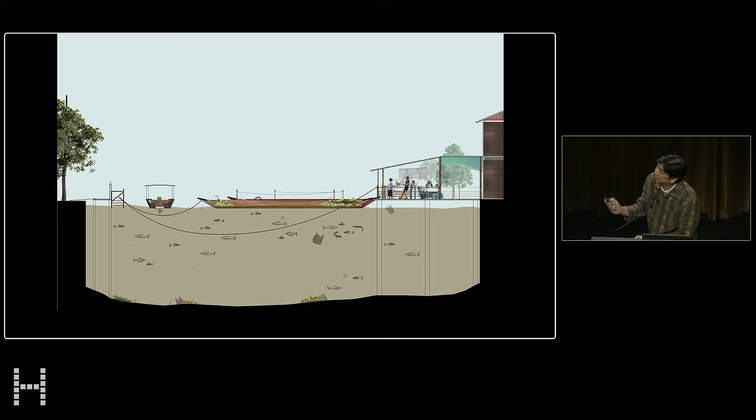After seeing this, what I do is I draw, and draw. I think seeing things from plans, sections, and elevations is the best thing I could do to honor these funky concoctions. For example, there's an isometric, but we don't only draw the boats, we draw the dirty water, the stray dogs, the motorcycle taxis, the corrugated sheets. We curate the sections. This section is cut through the boat so you can see how the rope is given slack so it doesn't get tied up in the propeller. We look at the details of how the pulley system is concocted, hacked at every joint. So in essence, with these three drawings, we see the detail, the architecture, and the urbanism.

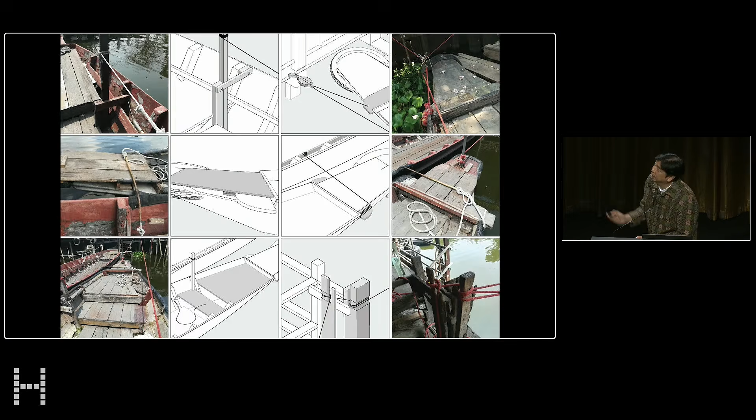And we always name them very simply, bridge, boat. This is just one example of what I call Bangkok Bastards. They're homegrown concoctions created by everyday people to solve everyday problems in everyday life. I've been collecting them probably since 2012.

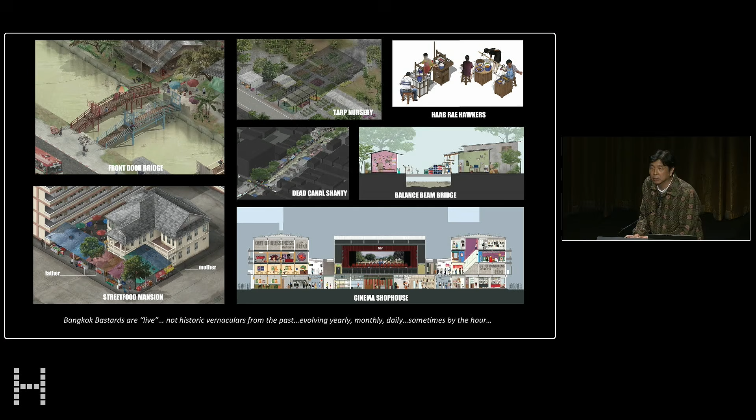So Bangkok Bastards are live. They're not historic vernaculars from the past. They're always changing yearly, monthly, daily, sometimes by the hour. And they're usually made up of cheap, inexpensive, salvaged materials because the people who make them are probably the underprivileged, which forces them to work within their means and thereby be very creative.

This is one of the first Bangkok Bastards that infatuated me. I started recording them in 2012. It's a construction worker house. They're all over Thailand. Construction workers in Thailand, like in many parts of Southeast Asia and South Asia, live on site. They collect old materials, whether old steel tubes, timber, plywood, to create their own dormitories.

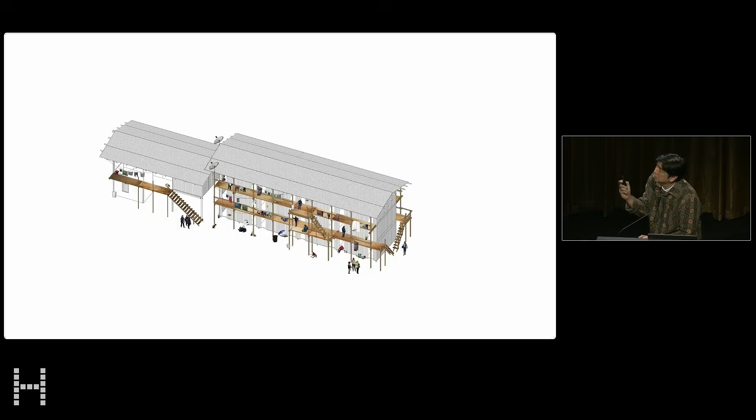But it's not simply a messy architecture. I was so fascinated by it, but I didn't want to be seduced by the romanticism of slum architecture. So at a certain point, I went in and started to measure and understand that it isn't just things hastily slapped together, but there's a system to it. For example, the core itself, or the rooms themselves, are probably very hot and humid, 2.5 by 2 meter rooms, very hot, kind of suffocating, and not much ventilation.

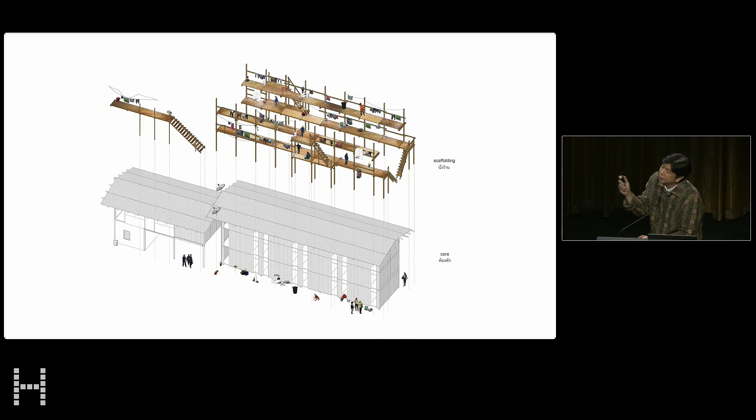But what makes life livable in the construction worker house is the scaffolding. This buffer space allows you not only to block the sun and the rain, but is a space for eating, drinking, getting drunk, washing clothes, hanging laundry—a multi-purpose living space.

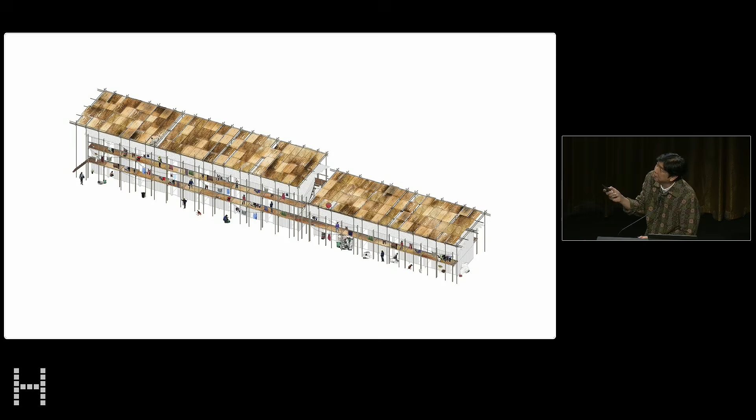So if you see that that's kind of a formula that construction workers play with, then they start to change it to solve other problems. For example, this is a construction worker house in the back of that site where debris was falling from above. And so the scaffolding was hacked so that it became a double roof, almost like a safety helmet.

Where the plywood top roof protects falling debris from puncturing the thinner corrugated sheet metal on the bottom. If you have scaffolding and core, you start to multiply. Core, scaffolding, core, scaffolding, core. From house, you have housing. The playfulness doesn't end at the diagrammatic level. The corrugated sheets get bent into a V. It becomes a water runnel that reflects back onto the underside of the corrugated sheets, making a beautiful natural light fixture.

If they run out of corrugated sheets, they bring in agricultural tarp, which changes the meaning of architecture. For example, instead of a typical door with a doorknob, you basically just unbutton the door and go inside. Once inside, there's no standard window. All the workers are pretty much lying or sleeping on the ground because it's cooler. There's no furniture, so they simply peel up the wall, creating an aperture of light and air that comes in just where they're sitting.

I was also very much interested in what I call the curtain sex motel. It's a building typology I was at first afraid to go into because strange things happen there, and I wasn't able to get access. But one day, I was able to find the owner of one of these curtain love motels, and he allowed me to go in and study his picnic curtain sex motel.

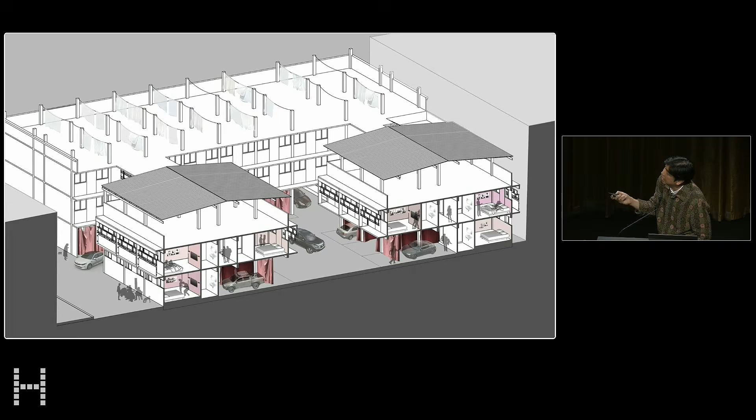As you approach, you go through the tunnel. Sometimes the tunnel is very scary because they buy a whole shop house just to carve a tunnel through. And then you emerge into this open air internal street where an attendant beckons you into one of these curtain spaces, and they close the curtain. And then afterwards, you come out of your car, and there's a room attached to the parking spot where you can go in and play gin rummy or whatever type of games you want.

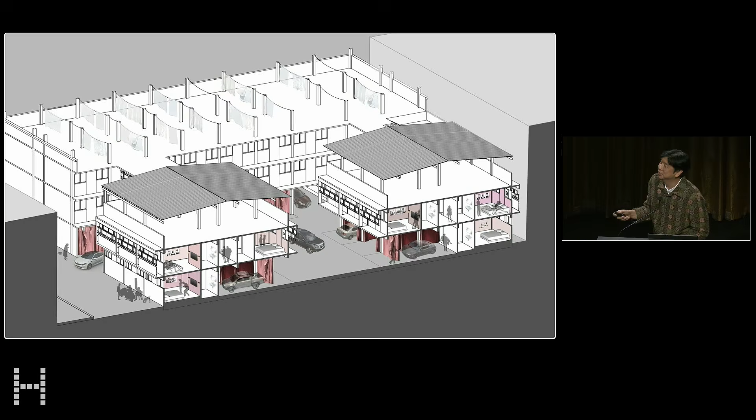After 10 minutes or 2 hours, you leave. And there's a secret exit, a side alley that allows you to make a quick escape because your husband or your wife may be waiting at the front entry. So here, I diagrammed it for you. You go out like that.

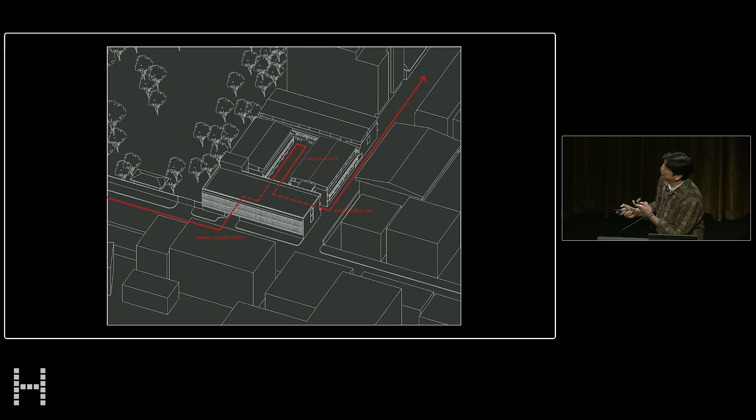But then 4 years later, after breaking my heart, he said, 'Chat, I just bought another sex motel. Would you like to renovate this one?' I said, 'Yes.' This one's called the Mit Paisan Curtain Motel. It stands for Friendship Motel. Okay.

So keep that in mind as we develop the program. I'll talk about the program. Eventually, he saved up enough money to buy a taxi, eventually becoming a manager to a tailor shop that he named James Taylor. Some of you, the younger people, may not get it, but the older people may get it. And eventually buying a slew of love motels. That's become his own business.

So the Friendship Motel has a courtyard just like the Picnic Hotel. It has the standard tunnel that the car would go through. Inside, you have the open air internal street. The problem with all living units or guest units in curtain love motels is they're very small because you don't spend very much time in them. They're about 3 meters by 4.5 meters.

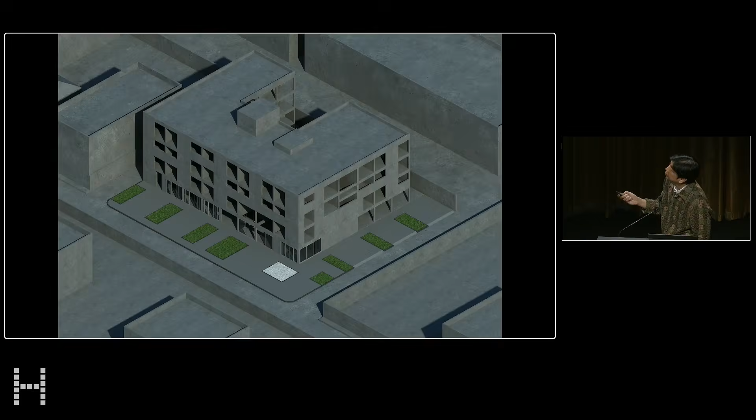We're going to cantilever a bed box from the existing structure so we don't introduce any extra costs. So there are these bed boxes that in the daytime you can play on your phone, you can read, look down to the street, but at nighttime it becomes a third bed. If this were the building stripped of its fake brise-soleil, what we added was these bed boxes. These bed boxes were minimal in size because we wanted to be very frugal.

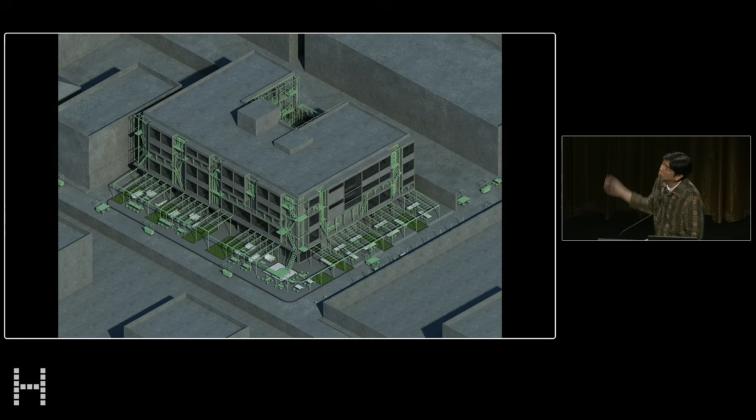It had a 1 meter by 2 meter clearance, just enough for a twin-size bed. But what happens is you're left with these gaps between these little pods that are filled with the scaffolding I told you about, that you find all over informal architecture in Thailand. But in this case, the scaffolding will turn a once dark and mysterious building inside out, turning this love motel into a street hotel that hopefully energizes and brings life back to this red light district.

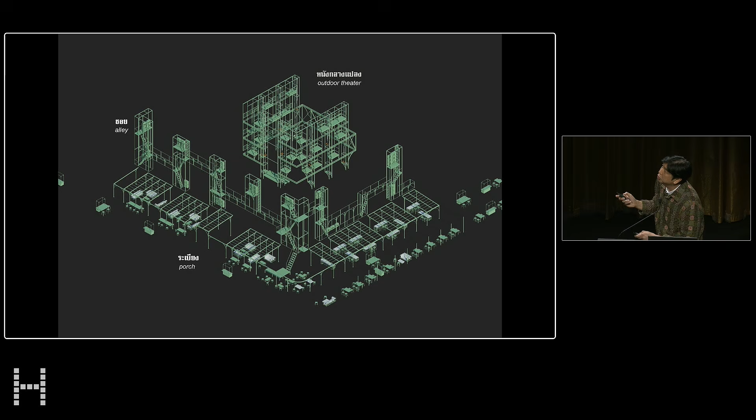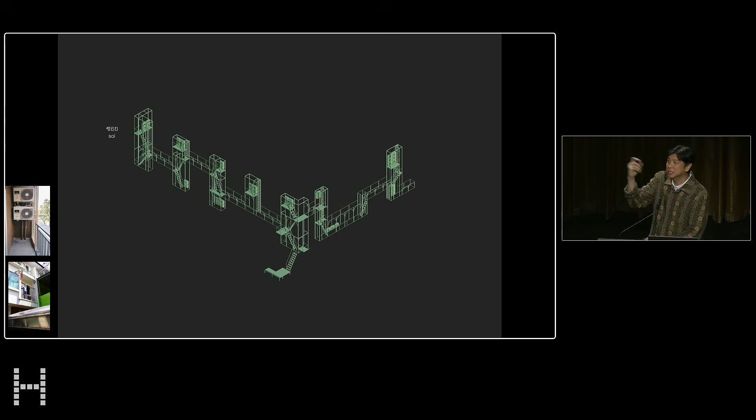So the scaffolding is composed of three elements: the porch, the alley, and the outdoor theater. The alley is actually a vertical circulation that allows repairmen to service all the air conditioning and MEP systems, so that you won't have maintenance people going through your room and your bedroom to service them on the balcony, which is usually the case in Asia.

So you've got this kind of walkway that repairmen can use to service MEP. But then there's another surprise function I'll show you later with these little vertical alleys.

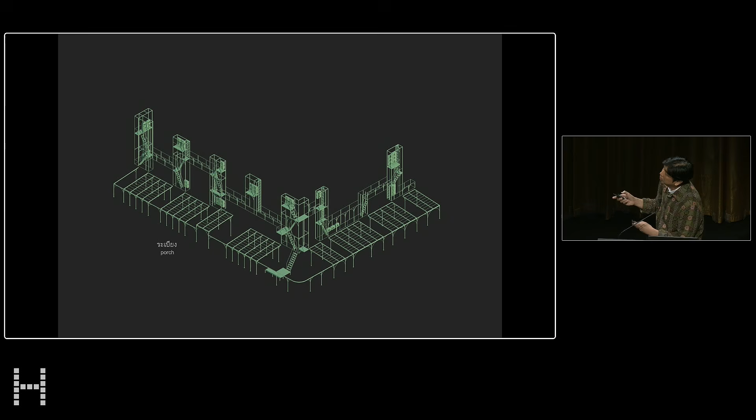The porch basically makes most use of space that's usually neglected, which is the setback. If this were the perimeter of the site, typical developers would say, Chat, put up a wall, a solid wall. We want to keep the vagrants out, and we want to create this private oasis garden, right? But what happens with terrible walls that we've seen in Southeast Asia is it kills the city. Nobody wants to walk next to a CMU wall.

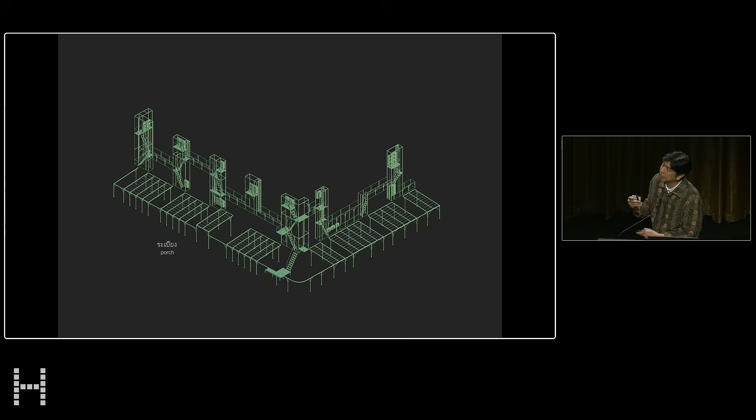So instead, we decided to create this connector, a veranda that allows locals on the sidewalk to have a beer with the hotel guests inside. But also, we go back to Papa Tony's first love of street food.

So this is Brother Chicken. Thai people have weird nicknames, so his name is Chicken. This is his armada of Thai sausages that he prepares every morning before he goes out.

So we had a conversation where, what if for breakfast Papa Tony sends his guests down. Instead of just having a continental egg and bacon breakfast, you come down and have Thai beignets, soy milk, or Thai sausages, and you support the local economy. In that sense, you create a new, authentic branding for a street hotel. So it works both ways.

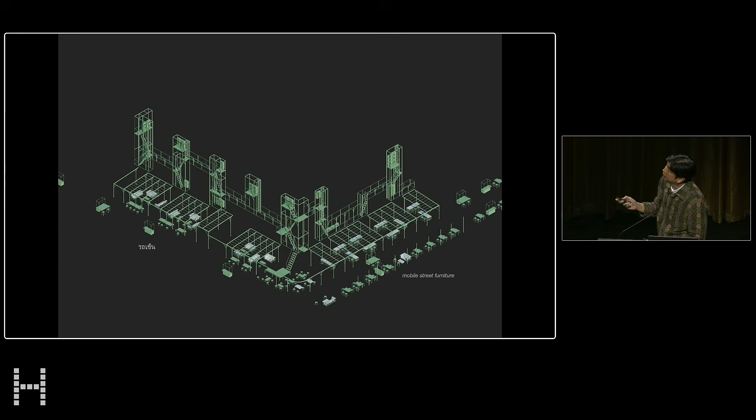For us, architecture in Thailand isn't just walls and floors and roofs. It's basically folding tables, plastic chairs, food carts, all these non-architecture elements, even these blinking holiday lights, create space, but space that's dynamic and always changing.

On that day, I forgot to mention that at the time, the municipality was cracking down on street vendors because they wanted to clean Bangkok up and turn it into a Singapore kind of situation, where you have hawker courts and can localize the vendors in one area. But to us, that would kill street food in Thailand, where vendors need to roam to find their customers, right?

So at that time, Papa Tony allowed vendors to come and sell on his private property so the police wouldn't chase them away. If you remember the vertical alley that repairmen used to service air condensers, on weekends and festivals it turns into a vertical stage. And I think this is our opening night.

So the air condenser landings became dance platforms for these beautiful Japanese housewives who volunteered to dance for us.

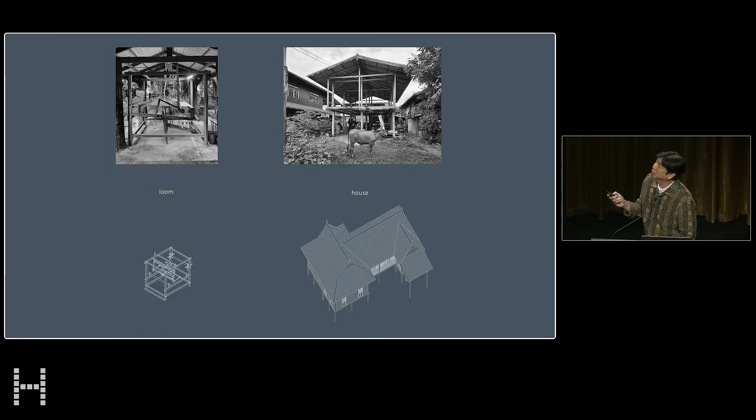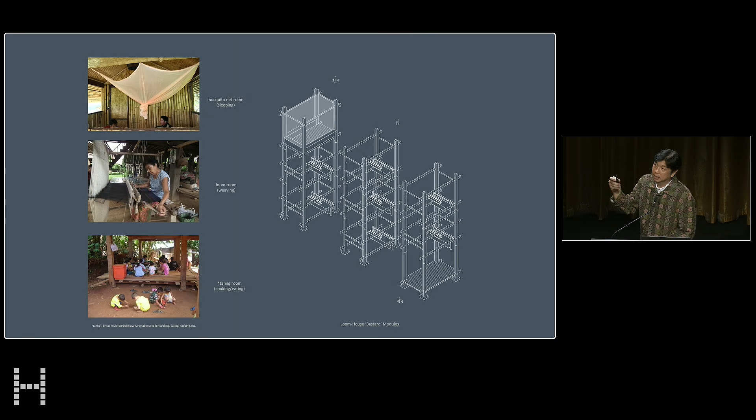So we started to think about how the loom and the house are really made from similar components when you explode them, and we tried to see if we could combine these components of the house and the loom into a new program that could potentially be workshop and housing for these elderly craftspeople and textile workers. This is an idea and concept that we developed for this loom house before anybody hired us, we were just interested in it.

And as is usually the case when we do research, eventually, whether it's 5, 6, or 7 years, an empathetic person comes along who's a perfect partner. In this case it's Kun Man, a wonderful textile artist who's in Sakon Nakhon as well. He does these amazing indigo textiles, but also all these natural colors from bark and leaves, and he wanted to collaborate with us to create this new workshop for his own textile workers.

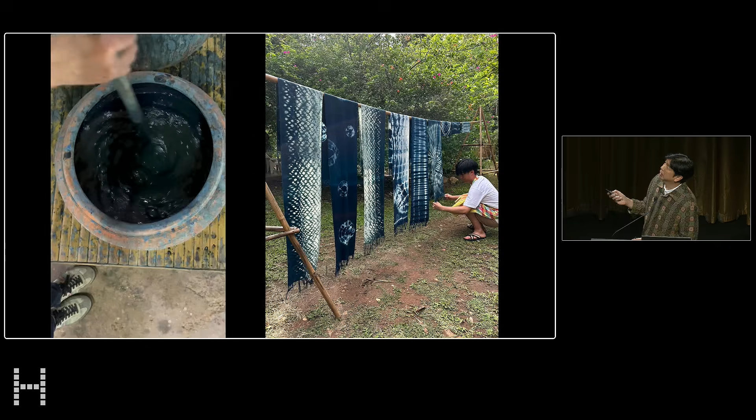So these are the wonderful indigo workshops that he has in his own forest.

He was an ex-lawyer who decided to try his hand at textiles and became a wonderful artist. He bought this piece of property to create a forest of natural pigment plants where he could examine and experiment with indigo and other dyes.

As usual, we always have to research the artifacts and the architecture around weaving. We started with the aunties who wove the textiles in Kun Man's business. This is Auntie Git and Auntie Gao, and they're the ones who create these beautiful textiles.

This is called a Baan Tai Tun. In Thailand, as common with a lot of Southeast Asian countries, there are houses on stilts that are lifted up to escape the floodwaters. The underbelly of the house actually becomes the workshop where the looms and other weaving artifacts are. So we try to understand all of these spaces and how they're used.

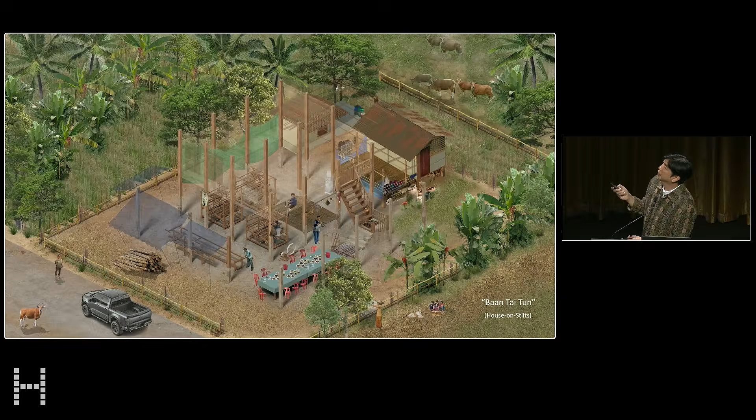I'm making it very simple, but weaving is very complex, especially when you have to set up the weaving process. You have the warp string, thread, and the weft. Basically, you have to count the total length of the warp before you set up each textile. This is a tool that you basically just walk around maybe 200 times to count correctly how much warp you need. It's an interesting tool.

At the end, we wound up with all these Bangkok bastards and basically tried to create a new concoction called the loom house. As always, we try to use salvaged materials. These were old columns from old Thai houses that have these great notches in them where the beams were notched in. These scars to us were very beautiful, and we want to celebrate them.

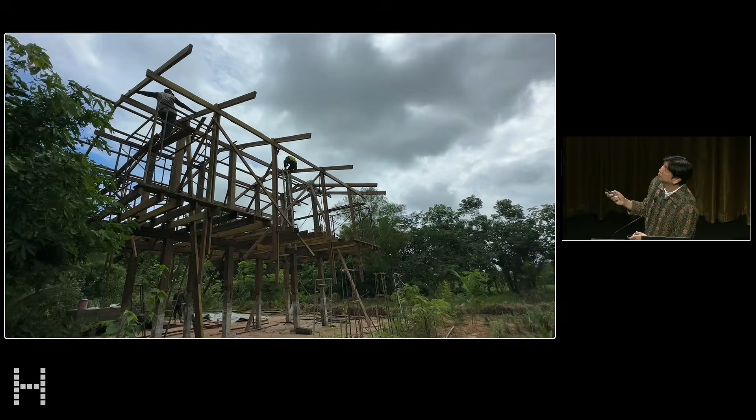As you can see, because this is called a loom house, the structural elements—if you see these 4 legs—are actually the dimensions of the legs of a loom. So these 4 loom legs actually support the whole house. This was situated right next to a rice paddy in Kun Man's garden. The legs become the loom, but also are structural columns for the house itself. Even the notches are improvised so that the cross beams are snaking up the notches.

Kun Man one day suggested, wouldn't it be great if we could dye the house the same color as his textile? So he created a new tempera indigo paint in order to paint the house in indigo, and here the villagers are helping out. So from the loom house, it became the indigo loom house.

And I think there's a short video. The bottom level is reserved for the wet process, for example the mixing of the indigo and the dyeing.

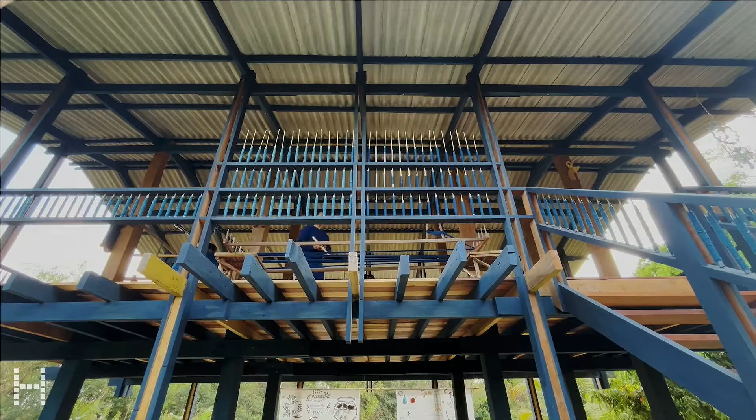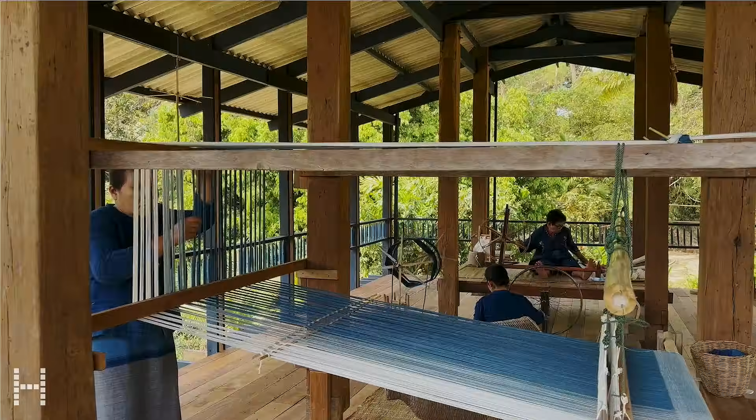Here you see we created this new bastard, the warping wall, where we hybridized this warping frame into a vertical element. The handrails also become containers for the indigo spools as well. Now the weavers can actually come and weave together rather than being alone in their homes.

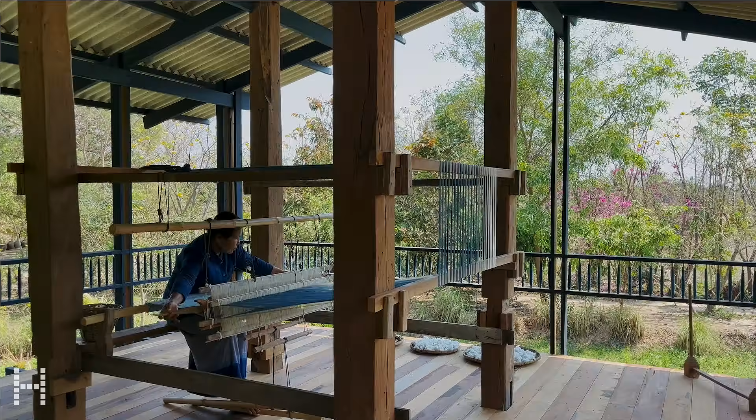On top of being able to weave together, there are now weekend workshops where the weavers can come and share their knowledge with the community, whether from Bangkok or foreigners who've traveled afar. So it gives new meaning to the weavers that used to be isolated in the underbellies of their houses.

In actuality, the loom house didn't start with this project. The first concept was actually what I call the loom condo. I imagined a rurality that would be densified and modernized, not with concrete or cement roads and apartment high-rises, but there would be a density, a beautiful natural density of architecture that would sit in the rice fields.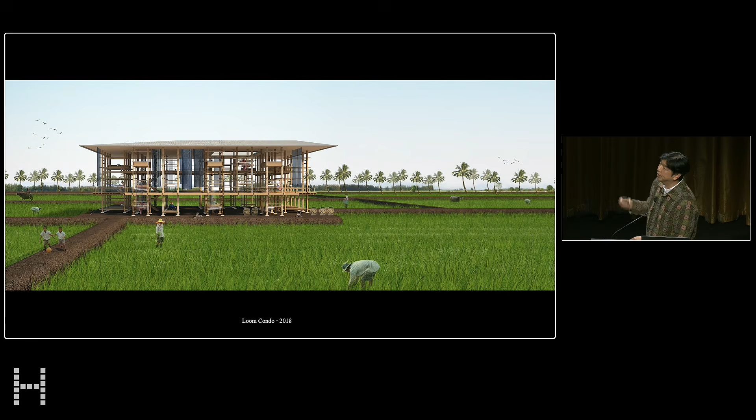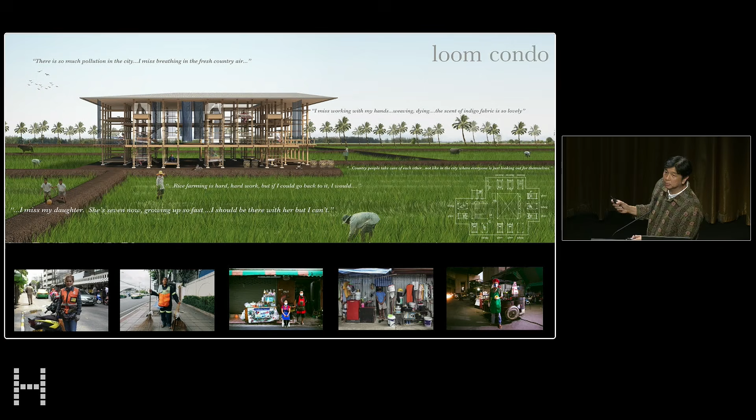And really sustain the idea of agricultural life. We did this not only to create a community for the grannies, but it's actually for all the workers in Bangkok, because many of the workers in Bangkok come from northeastern Thailand, whether they're street sweepers, motorcycle taxi drivers, or construction workers. These are some of the interviews we conducted, because all the migrant workers don't want to live in Bangkok. It's noisy and polluted, and they're separated from their family.

So some of the quotes are: rice farming is hard work, but if I could go back to it, I would. Country people could take care of each other, not like in the city where everyone is just looking out for themselves. I miss my daughter, she's 7 now, growing up so fast. I should be there with her, but I can't.

So from Sakon Nakhon, we go to Ang Sila. This is called the Angsila Oyster Scaffolding Project, located in Chonburi Province, just about an hour's drive from Bangkok.

So Chonburi Province is quickly modernizing. You have a lot of factories, as well as cookie-cutter developer homes. But in this little corner is like a little anachronism, out of space, out of time—this beautiful Ang Sila fishing village with these beautiful radial streets.

So we basically had a project with a client who wanted to develop this piece of land into a mixed-use space. Eventually, that project didn't happen. But while working on this project, we suggested that we should research the neighbors in order to create a new program. So we wound up spending 3 years researching, becoming very attached to the fishermen and the oyster fishermen in Ang Sila, and really having a great time building great relationships.

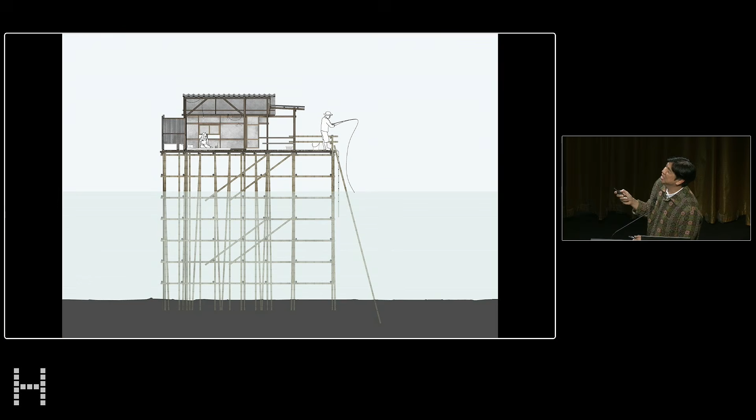But what's amazing about the construction with this bamboo scaffolding is that they're all made by the fishermen themselves, because no contractor would know how to build this. They go to the nearby auto factory plant and buy these rejected car seat belts that are salt-proof, waterproof, sun-proof, and create this new binding.

While researching this, we start to understand not only the beautiful elements of the culture, but the problems that came with Ang Sila. For example, at that time, a lot of people from the city would say that Ang Sila fishermen were not very honest, because the seafood we would buy at the market there, have prepared fresh and steamed, as soon as they come back to Bangkok an hour later it would be spoiled and rotten. So a lot of the public felt that they were selling unfresh and spoiled seafood to the public.

But that's really not the case, because a lot of the problem happens because the fishmongers who buy the fish, oysters, and clams from the fishermen early in the morning after a catch could take hours, and sometimes days, to take them to the market without cold storaging them. So that little portion of time that the oysters or fish spend not on ice is part of the reason it doesn't come fresh.

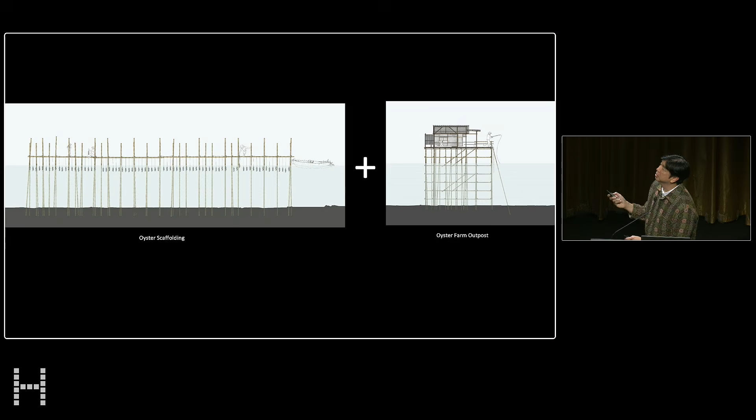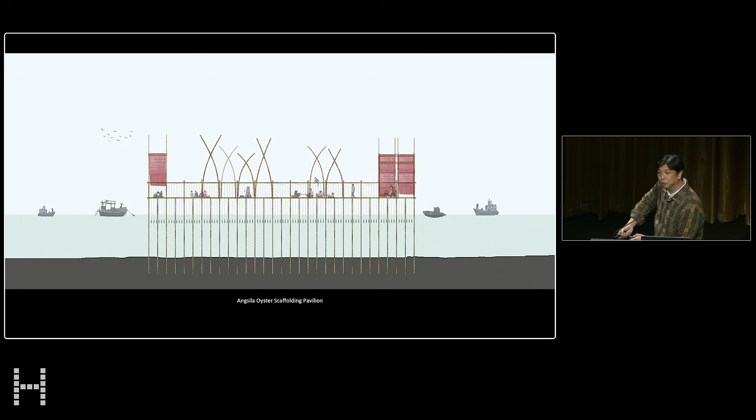Every project always has a main protagonist that helps drive it forward. This is Uncle Jun, a longtime fisherman who taught us how to choose seafood, whether crabs or oysters. He invited us to his home, where his wife cooked secret Ang Sila recipes for us, and we would dine with them, thinking how wonderful it is to eat fresh seafood that's just been caught. So we thought about bastardizing the oyster scaffolding and oyster farm outpost into a new hybrid called the Angsila Oyster Scaffolding Pavilion, where you can take guests out to have oysters pulled fresh from the ocean and learn about the lifestyle and cultural knowledge of the fishermen.

This is how the fishermen build their structures. First they cut local bamboo from nearby forests, load it onto boats, and take it out to sea. Once they find their spot, they drive the poles into the muddy ground, pogo stick style. Once the poles are installed, the bamboo beams are tied, and you'll notice they overlap. They never cut any bamboo because they don't want to create garbage or leftover pieces for the ocean, so everything is saved.

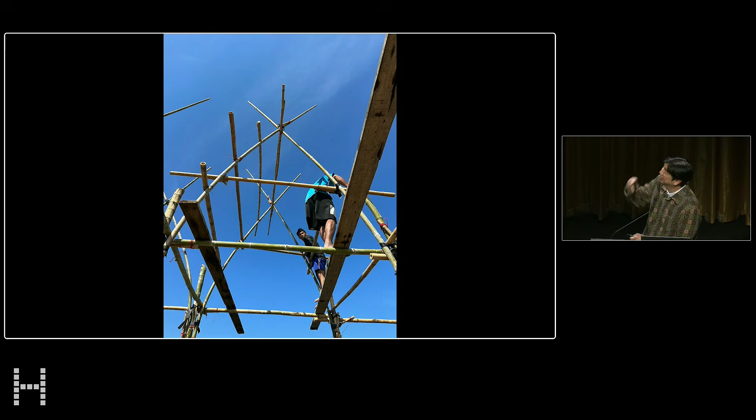We were doing a little gable for a tarp roof, and because we don't want to cut any of the bamboo, it becomes a new architectural language. You have these little antennae that stick up. If the ceiling height is lower, the antenna becomes longer; if the ceiling height is higher, the antenna becomes shorter.

On the day of the tour, guests come and load onto the fishing boat, so the fishermen now have a new economy as tour guides. We go out and tour the oyster bamboo farms first, and as you pass through them you see a flash of red, then come upon the oyster scaffolding pavilion. The boat drops you off at the front, where you climb ladders, and as you go through the portal you understand that all of this is made from materials from the ocean, materials the fishermen use. Nothing foreign has come in.

Even the rope we use to tie the oysters is used to bind the bamboo. This is a beautiful detail I call the accelerator. You have a seat belt tied around the joint, but because a person doesn't have the strength to tighten it, there are dowel accelerators. You twist it until it's tight, then tie it off with red string. I think it's a beautiful, common detail.

As you walk from the single gable to the triple gable, this is where the open kitchen is. But instead of a refrigerator or freezer, you basically jump down and pull up fresh oysters to eat. In doing so, you're able to explain to guests how important it is to maintain the health of the ocean, because the oysters you're about to eat are coming straight from it. You guys must be getting hungry.

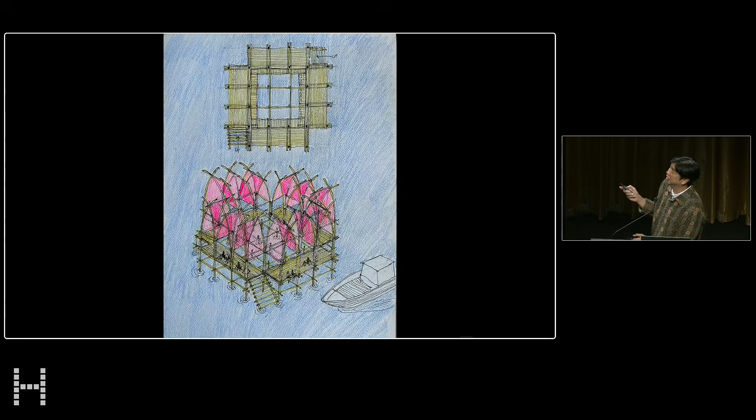So the kindness of these donations allowed us to do scaffolding 2.0. It's smaller, more compact, rather than this linear formation. It becomes a little courtyard in the middle of the ocean.

Do I have time for one more? Yeah, great. So this is a project we haven't shown anybody before because we just got the photos last week.

So the latest project, we've been working with the Karen indigenous people. The Karen tribe, a hill tribe, number about 5 million, and they are indigenous people who live along the borders of Myanmar and Thailand. The group we've been working with is right about here in Ratchaburi province. From Bangkok to Ratchaburi is about a 3-hour drive because it's up mountainous terrain.

The Karen people live very much in balance with nature, especially in the forests and the mountains. But as with all indigenous populations, you have an older generation living with the forest sustainably, and a younger generation who dress in typical Karen outfits but also enjoy TikTok, YouTube, and 7-Eleven, just like a normal kid.

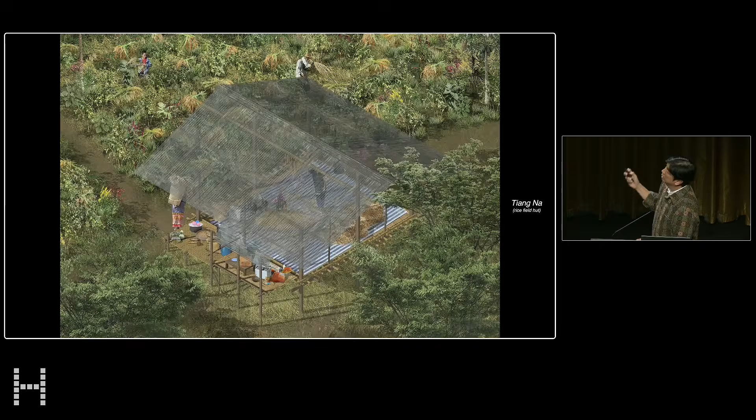Here you can see the rotational crops starting to emerge where it's not just rice. This is a rice cultivation. We looked at architecture—this is called a Tiang Na, or rice field hut, that allows you to collect the grains. We also studied these beautiful bamboo planting canisters where they mix rice, sesame, chili, melon, and squash into one canister to spread throughout the farm.

Creating this multi-seed plantation, we also looked at furniture. The Karen are experts at bamboo because they have wild bamboo growth all over, and the tectonics of their benches, integrated with trees, are quite beautiful.

So with all of this, again, we looked at everything—not only architecture, but furniture, tools and artifacts, ecology. We spent 2 years with them. Eventually, there came a program where the villagers wanted a market, a simple roadside market along this interstate freeway, with cars zooming by on this little plot.

The Karen were experts in bamboo construction because they lived with it their whole lives in the forest, and bamboo was plentiful, free, and accessible. When we asked them what they wanted in terms of programming, they said they wanted 9 food stalls and a community eating area, but not a typical city food court or modern neighborhood mall. Instead, a place where the community could be with nature and feel the wind. I saw elders and young people just sitting in the field, absorbing the wind and feeling the breezes go through them.

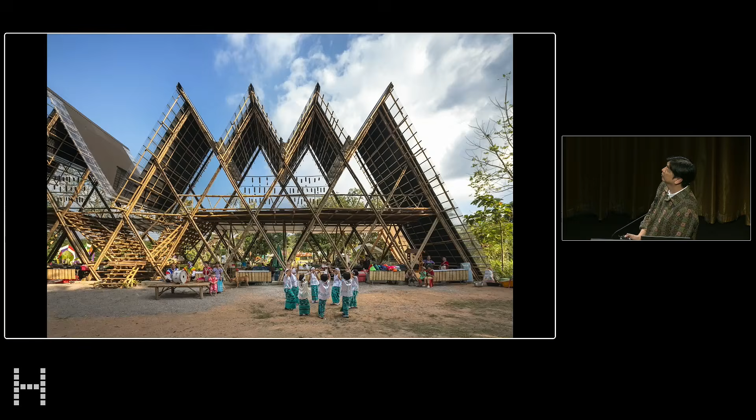I made good time, right? Excellent, excellent, wow, thank you so much. It is actually incredible work, and very, very moving. Wow, where to begin? As I see your work now, first of all, thank you for bringing this incredibly moving work to us and to share it with family. Yes, I feel like family — I feel like I'm at home. That's a really big part of it for us, that you could come back to share this.

I was thinking about the fact that all of the work you're showing — first of all, there's an incredible delicacy to it, part of it is that it's so ephemeral. It reveals its vulnerability. It's clearly looking at issues of the wind, and this very delicate nature of the work. I'm curious, how does this way of thinking and working scale?